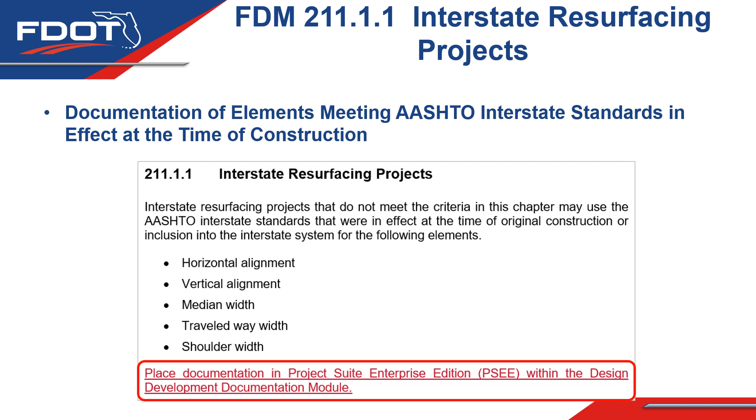Two changes were made to FDM 211.2.2. The first change to this section was for shoulder cross-slope transitions. Transition rate and minimum length of transition requirements were added for shoulder cross-slope transitions at bridge approaches. The intent of this revision was to standardize the shoulder cross-slope transitions.

The second change to this section was for a new 4-lane section in Figure 211.2.1. It was a result of the TDH migration. This new standard pavement cross-slope section can be used for any limited access facility. The Turnpike typically uses this 4-lane section for roadways with design speeds of 70 miles per hour to be more compatible with future widening and to mitigate hydroplaning risk.

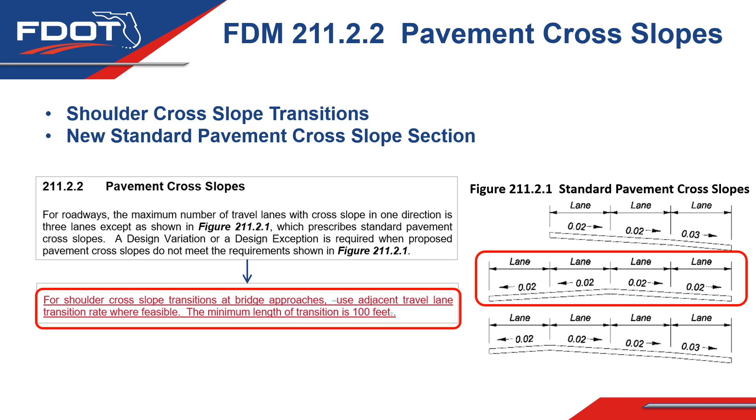New language and a table were added to the hydroplaning risk analysis section to provide requirements for when hydroplaning analysis is to be submitted. Coordination with the district drainage engineer was previously required to determine if hydroplaning analysis was necessary. The FDM was silent on what triggered an evaluation and when it was to be submitted. These revisions better define when hydroplaning needs to be submitted and what the evaluation should include.

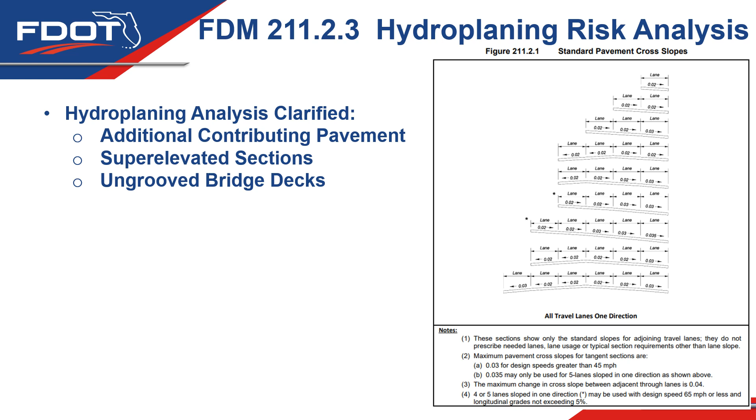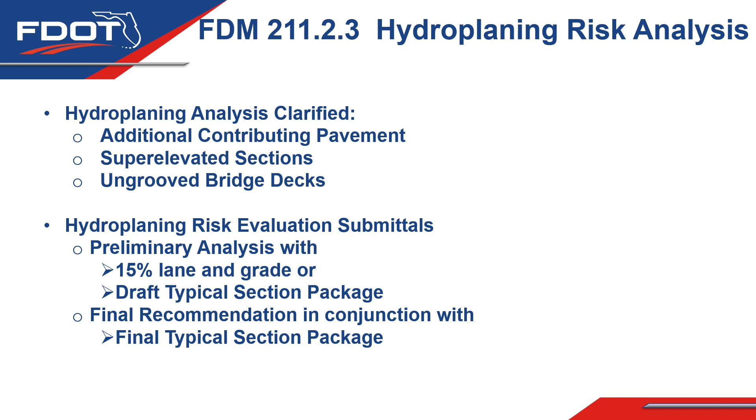Hydroplaning analysis is required for projects when additional contributing pavement is added to the standard pavement cross-slope sections in Figure 211.2.1, for superelevated sections as shown in Table 211.2.4, and for ungrooved bridge decks that exceed previously mentioned requirements. Where a risk is identified, provide a risk evaluation in a report format that includes identification and benefit cost analysis of mitigating strategies. Submit the preliminary analysis with the 15% line and grade or draft typical section package. And finally, provide a final recommendation in conjunction with the final typical section package.

The notes in Table 211.4.1 were revised. Note 1 was added for turnpike projects with 3 lanes or more in one direction. For these turnpike projects, a 12-foot inside and outside paved shoulder is required adjacent to travel lanes with high volume AADT or greater than 10% trucks. The note was added to be consistent with turnpike paved shoulder requirements that had been part of the TDH. The second note was modified to clarify that the 12-foot outside paved shoulder should be considered for all other LA facilities with high volume AADT or greater than 10% trucks.

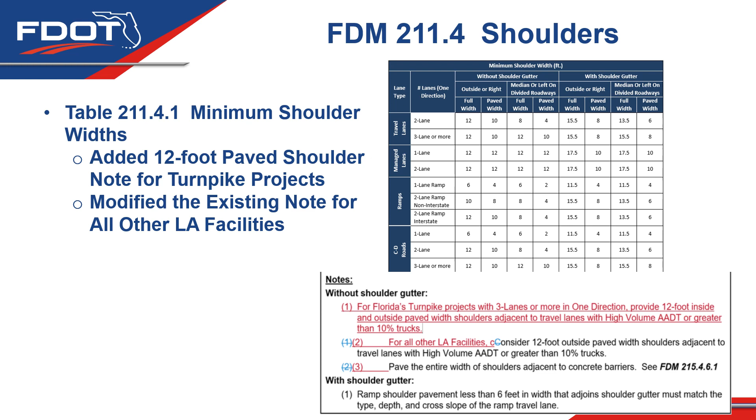A new subsection was added to the shoulder cross slope section as part of the TDH migration. This new subsection allows the use of shoulder rocking for maintaining a minimum longitudinal gutter grade to achieve positive drainage on limited access facilities. When shoulder rocking is applied adjacent to a barrier wall, there are some minimum height and offset requirements for design that were included here in this section. And options for meeting minimum spread criteria for outside shoulder rocking are also included in this section. And the plan requirements for shoulder rocking are now included in FDM 915.

Minimum vertical profile grades now apply to new construction and significantly modified profiles for limited access facilities. The intent of this new criteria is to limit the need for shoulder rocking on future widening and resurfacing projects. This new change is a result of drainage challenges encountered in urban areas and also because of the TDH migration.

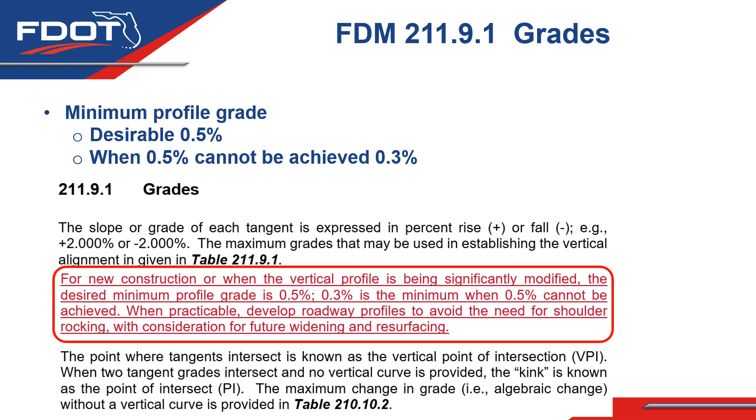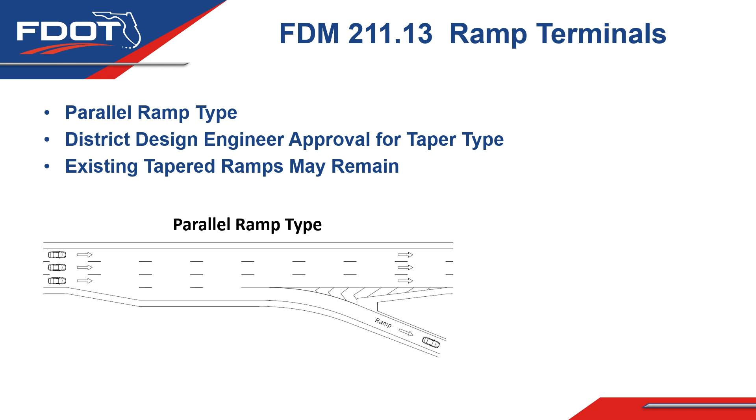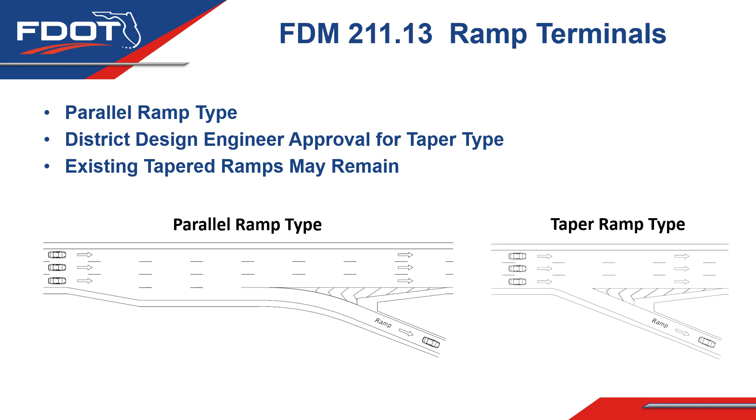A few sentences have been added to the ramp terminal section associated with preferred ramp type. The parallel ramp type terminal is the preferred ramp type. The use of the parallel ramp terminal provides a smoother transition on limited access facilities by providing acceleration and deceleration lanes. This is especially crucial on high volume roadways because it also adds additional queue storage for ramps, avoiding a spillback into the limited access facilities. With this being said, the use of the taper type ramp terminals is not prohibited, but approval by the district design engineer is now required. Existing taper type ramps that are not being altered by construction may remain in place.

Access opening requirements for continuous stretches of guardrail or barrier wall have been added to the maintenance access section. The intent of this change is to limit the off-road distance maintenance vehicles and crews need to drive to get to things like lighting, ITS poles, and cameras. The maximum length of continuous guardrail or barrier wall is now 2,500 feet between end terminals. The access location points must be coordinated with the district maintenance engineer and the district ITS design engineer to ensure the needs of maintenance and operations are met. The preferred typical detail for roadside guardrail access openings can be found in the standard plans instructions for Index 536-001.